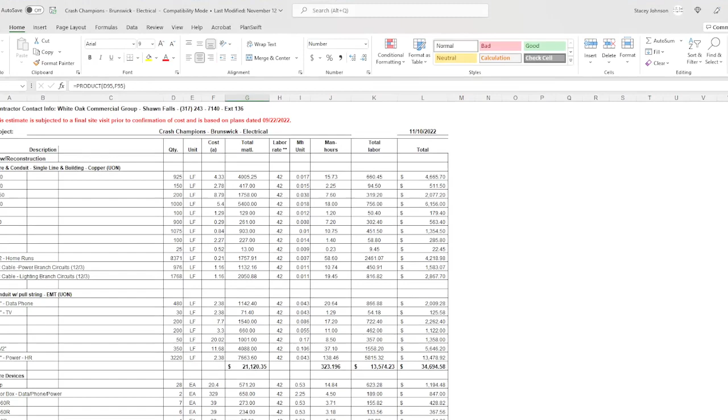Okay, and so you need a good counting tool and you need a good segment tool to measure lines and lengths. And so we'll look at an actual estimate to show you what you want to think about when you are getting your estimate together. Now, this is the way I represent it, and I've completed electrical estimates, only God knows how many, and electricians like the format because it's very clear. It tells them everything they need to know, and if they know their trade, which they do, they can determine if the numbers that you're giving them are kind of crazy or overboard.

Okay, and so you got to think, number 12 wire, you're always going to have a lot more of that. Because why? Because most of the power components run with 3 number 12s. And so you'll run one length for the conduit, but you got to times that by 3 if we're talking about the home runs. So the way we break it down, we have a section for our wire and our conduit. So all of the wire, even including for the single line, and then MC cable.

Most of the branch circuitry can be run with MC cable, where all of the home runs, of course, have to be number 12. Or if it's a particular type of mechanical equipment, it's going to tell you it needs 3 number 10s and a number 6, or vice versa, or whatever, and you'll know from that.

Okay, and so we break that down, all the wire, all of the conduit totals by length, and of course we use a cost book to give us the material cost for the wire and the conduit. Now, rest assured that if you use a cost book that's very accurate, like we use Craftsman, our material cost for the wire and the conduit is going to be 5% within local pricing.

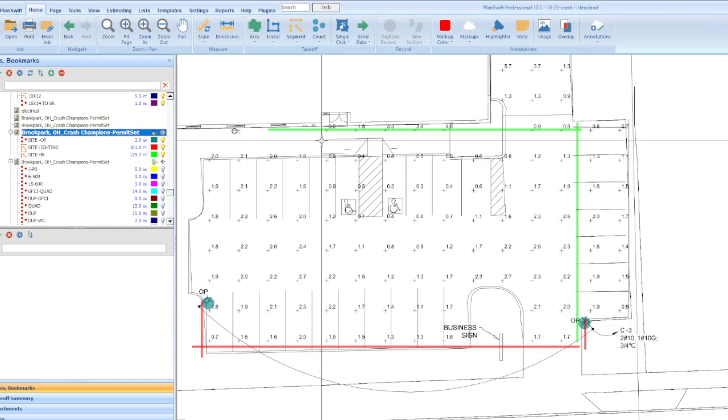But you go to our set. So this one happens to have a site plan. And so, straightforward, this is probably doing too much. They may go zip, zip, from here to that. Who knows? But I do the most. I don't think that's conservative. In the real scheme of things, if they have to trench that, they may not trench it again to go there. They may just go back here and then go like that. Who knows? But for the purpose of our estimate, every estimator has to figure out that same thing. So we're going to give it the most leeway.

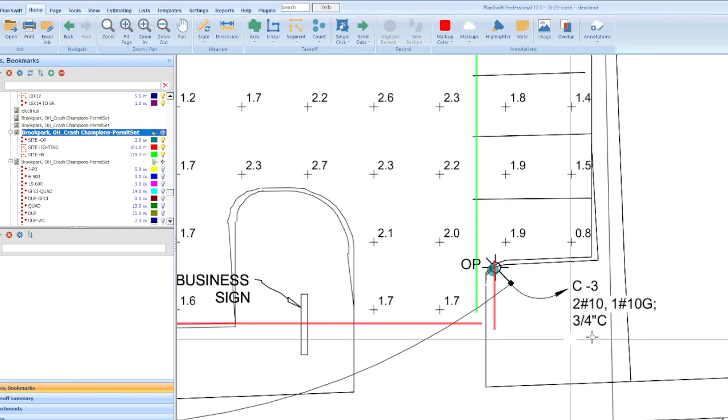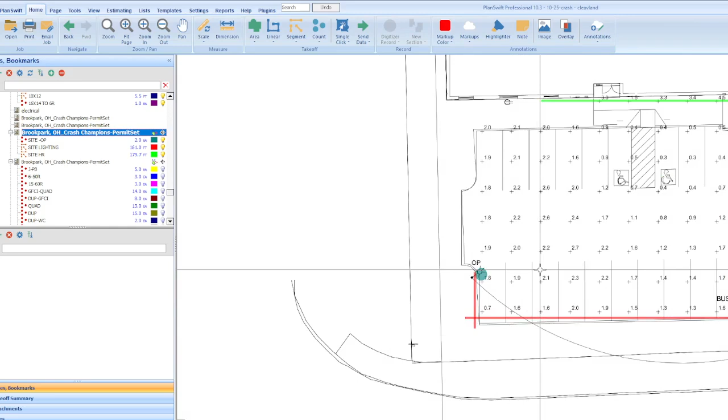Okay? So we know this is underground. We know that's PVC because it's site, right? So we don't have to think twice about that. And we know that it's 3 number 10s and a 3/4 inch PVC. Home run to position number 3 in panel C. So I took it from here, and then once I get into the building, I add whatever additional wherever the panel is in the building. And you got to account for it coming up, right? PVC to EMT, or rigid, or whatever. So just add like 10%, nothing that's mind-boggling. Especially for the initial estimate, because you want to bid as much as you can now. But once you win, you want to go back with a fine-tooth comb and say, okay, is everything covered?

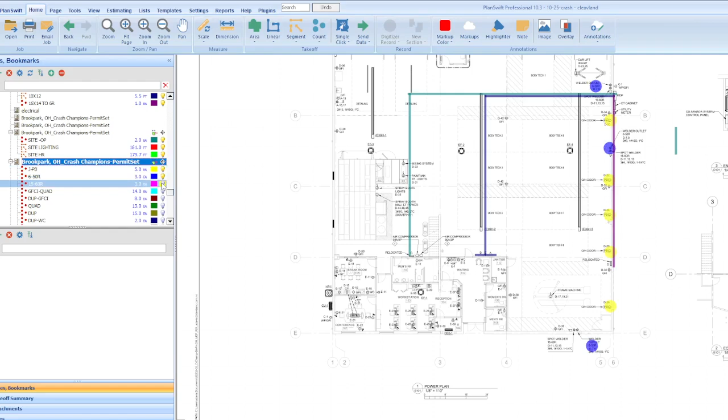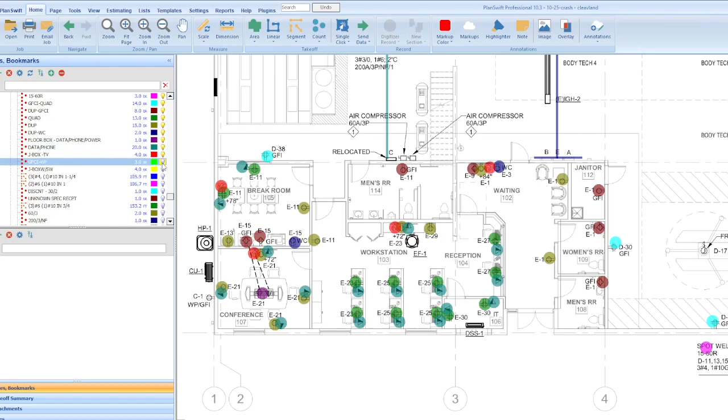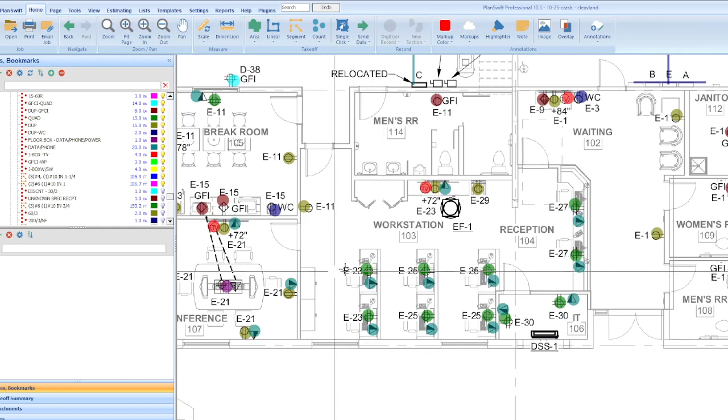Now, this is our power plan, and these are all of our outlets and everything. Duplex, right? Phone and data, so I know that's a duplex junction box as opposed to a simplex or a single one. Fill in everything. This had a lot of bubbles. Okay, so good counting tools are critical. Now, when it comes to your branch circuit, you got to look at where everything is connected. These are both going to position 27, panel E, so I could say these are connected here, and they're probably home run to that position, because they're quads. Same thing here. I can run the branch circuit here, and then I'm going to run an imaginary home run to wherever E is as far as running the wire.

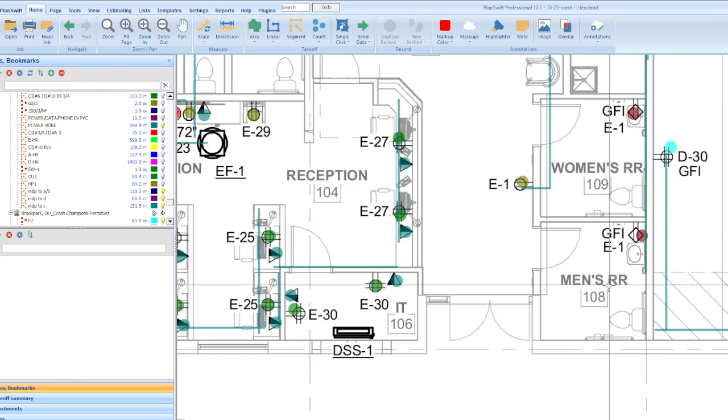Okay, let me see where I have my power wire. I might have done it on a different page. Okay, no, there it is. See? So things I know are going together to the same position on the panel, I'm going to run those all together, and then I'm going to home run that from that end to wherever. Here's relocated C, and where's E? Normally they'll put everything close. Yeah, here's E, panel A, E, B, and C, and then the disconnects. So all we can do is make the lines from where the plans say the stuff is, and we're giving it a good representation.

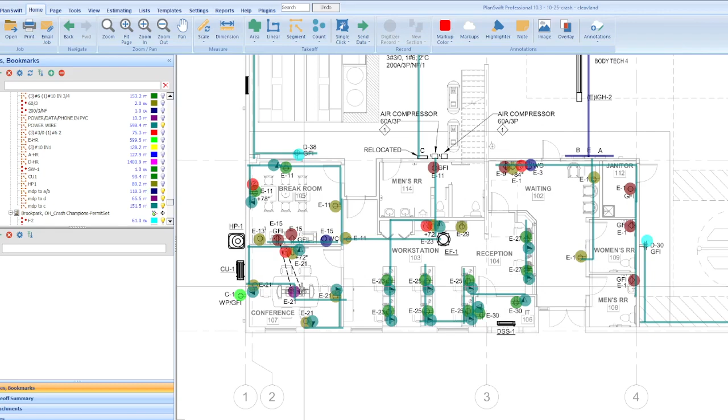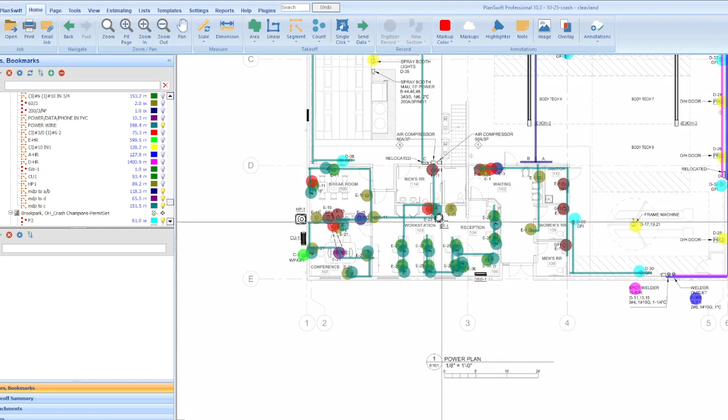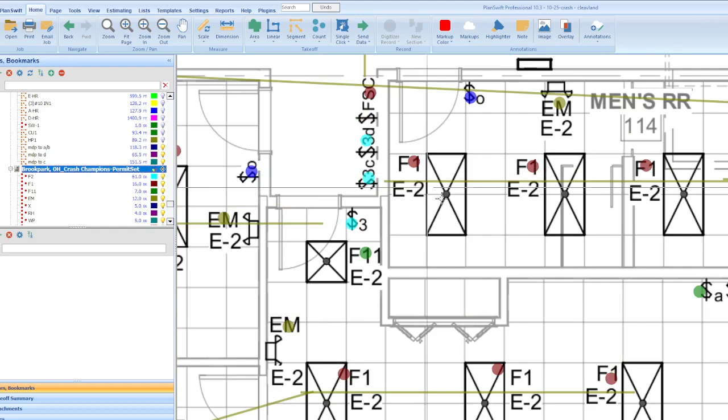We got some underground, so that's going to be PVC, and then we have to transition it up through the new partition. This is a floor box. It shows it on the table, but chances are it's in the floor where the contacts are anyway. So you have to do all of that, and all your lights. Same thing with the lights. You know that they're going to E-2, every other one. All of these are going to E-2, so you want to maybe put a little more diagonal, add 10 or 20%, because you want to give a good representation if it's not already given. We know these two are going to the same place and then going to that, and they're all going to be connected. So you want to do your best to give a good representation of how the electrician may run the wire. And then I think we added like 10, 15, 25%.

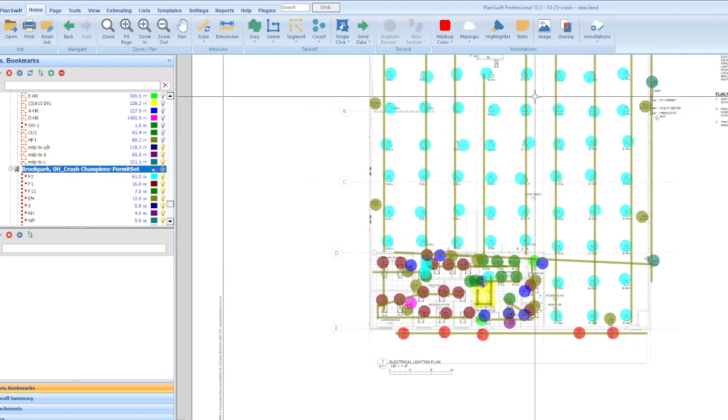Okay, and the electrician will be able to determine if that's a good number, and then we give them the takeoff. It's like, hey, should we be doubling this? Because the person that does the work doesn't know exactly how you should do it.

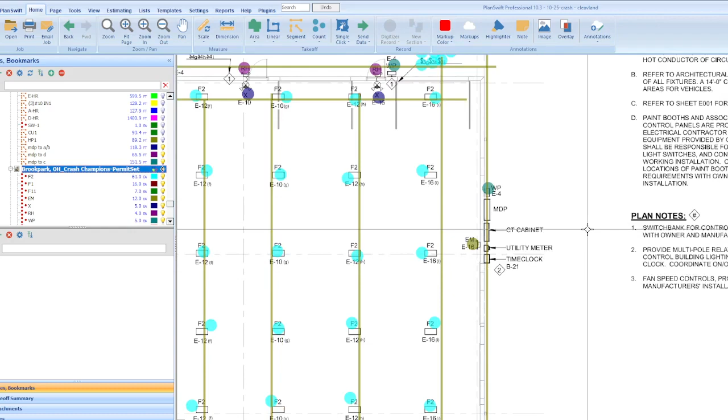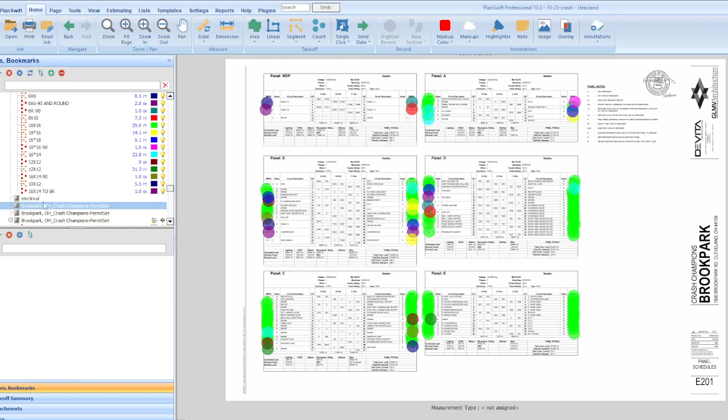Okay, CT cabinet. Now we had to determine for our power how far, because the main distribution panel. And let's go to. We had a good counting tool. Okay. Good counting tool, because you have to count all your breakers. And where's the single line? I think it was maybe in the beginning. So you got to look at the single line and say, okay, where is the single line?

Single line, where are you? Okay, well, we're just gonna keep it moving. I don't know. Where is it? Did I check there already? Of course, no, I did not.

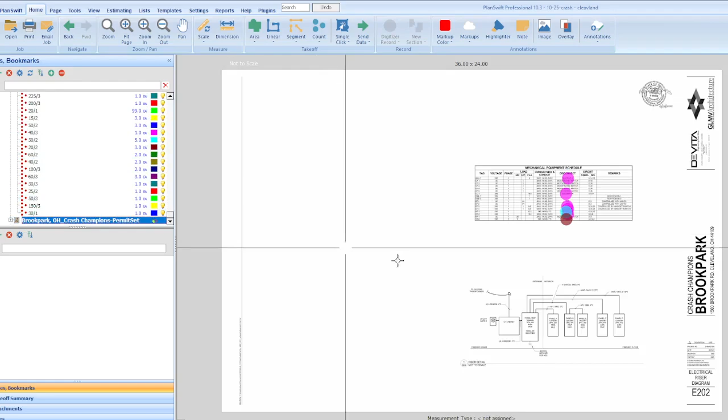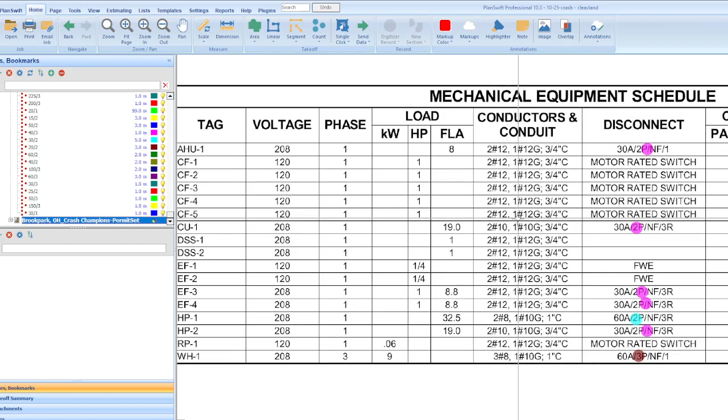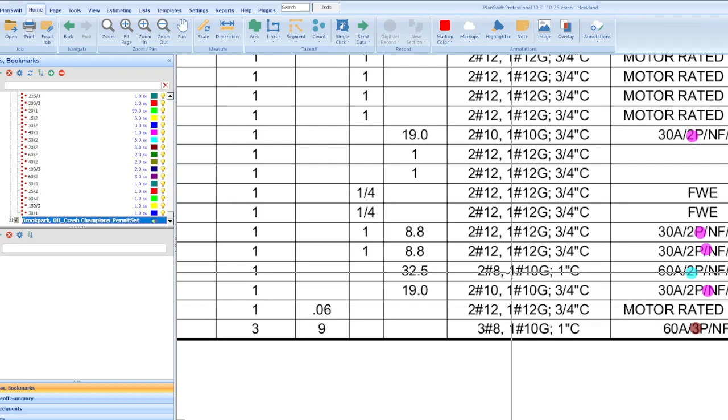Okay, so mechanical equipment, you want to make sure you know any of the home runs, basically, that are not all just number 12. And you want to pull that out, make sure you know where that is and run it to the proper panel. So you'll have all of the wire configurations, number 8s, number 10s. So everything's not always 3 number 12s, depending on the piece of equipment. So that's why they give you that. You got to make sure you pull that out.

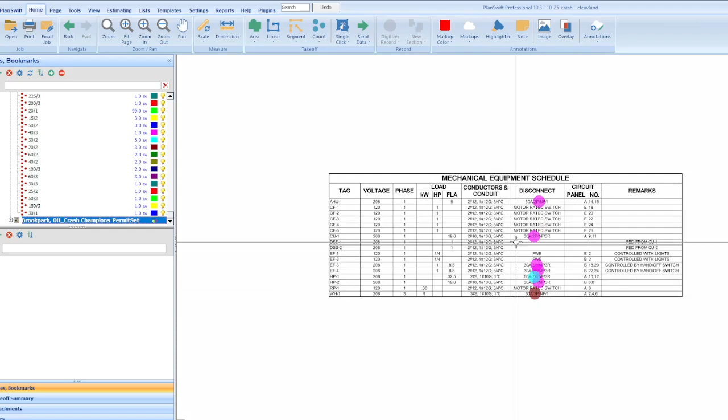Go back to the power plan, figure out where that piece of equipment is, and do your linear measure to the panel that it should be, and then say, okay, it's 3 times that distance, and then 1 times that distance for the number 10, and then a 1-inch conduit.

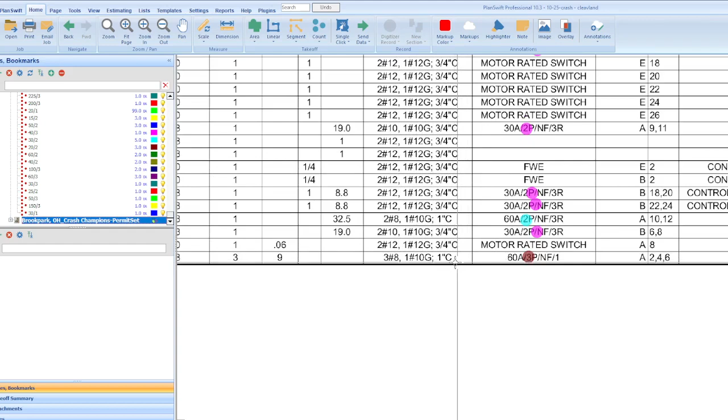Okay, so then for the single line, for all of the feeders, you have to physically go to the power plan. We saw that the main distribution panel was on the outside of the building. Well, in relation to panel A, got to find it. So we look here and we say the main distribution panel is connected to A, to B, to C, and to D. And then it looks like B and E are connected. And I got to figure out all of the physical distances for all of the power feeders to know the exact lengths, right?

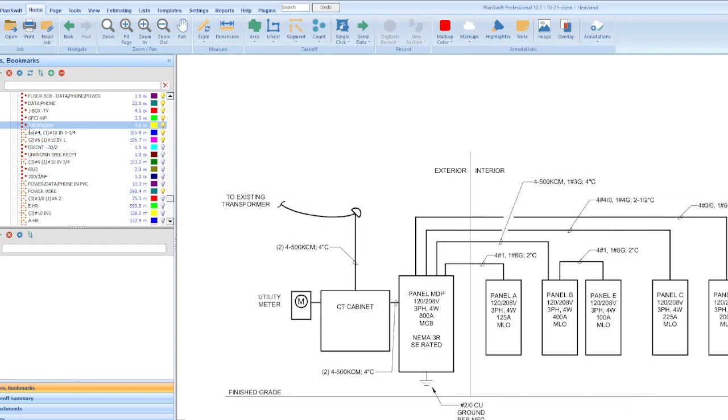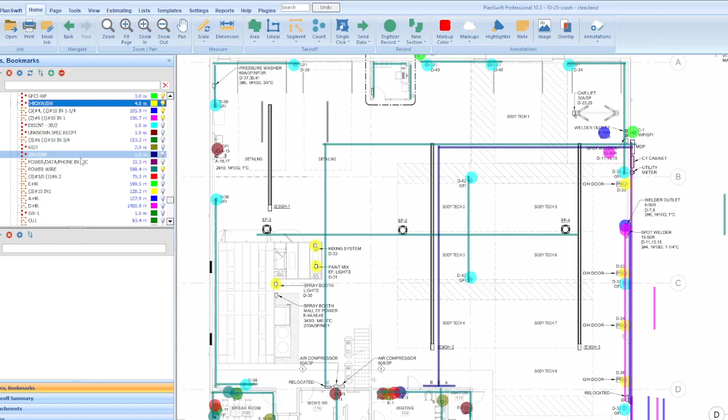So I say, okay, where's the main distribution panel? We just saw it right here. So from there to all of the panels, pretty much. Let's see. There we go. Oh, there already. Main distribution panel. Let me take it out. Main distribution to A and B is that one. Main distribution to D. Take it out. Is that one. Main distribution to C. Take it out and put it back. Is that one. So now I know those actual lengths. Plus add like 10 feet.

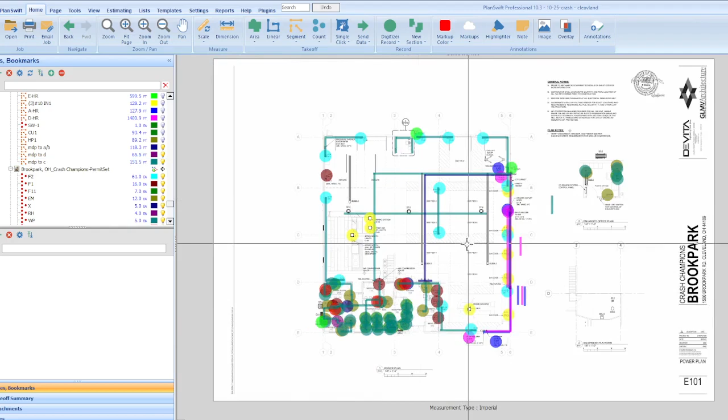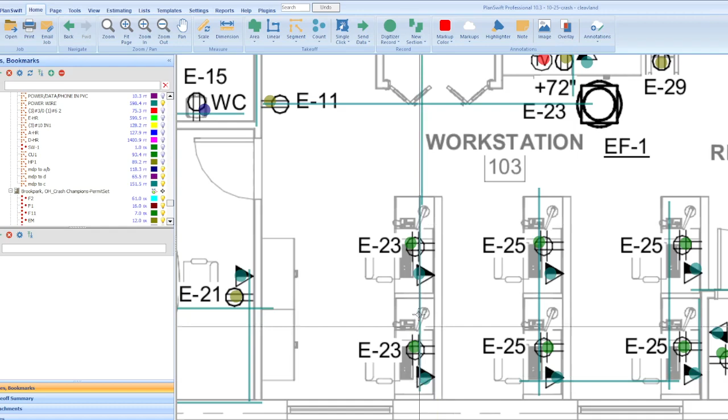Okay, so the basics of electrical estimating is having a real good counting tool and practicing on your conduit lengths. Now, you may get some plans that already have all the lines drawn and you just follow those, but when you don't, just know on the power plan, this is telling you that these two outlets are going to the same position in the panel, so the power feeder can run together. Same with this, same with that. And these can run together.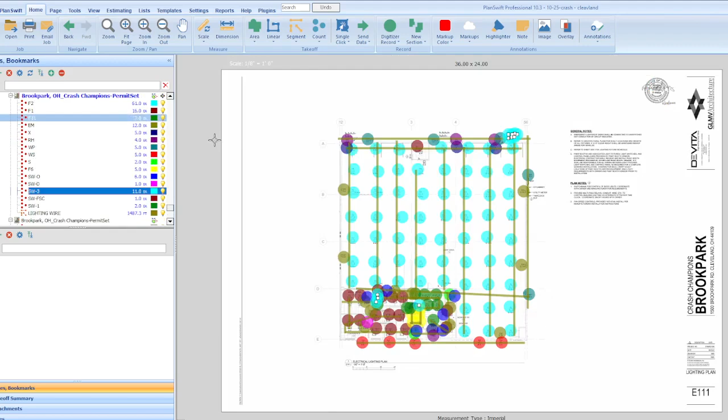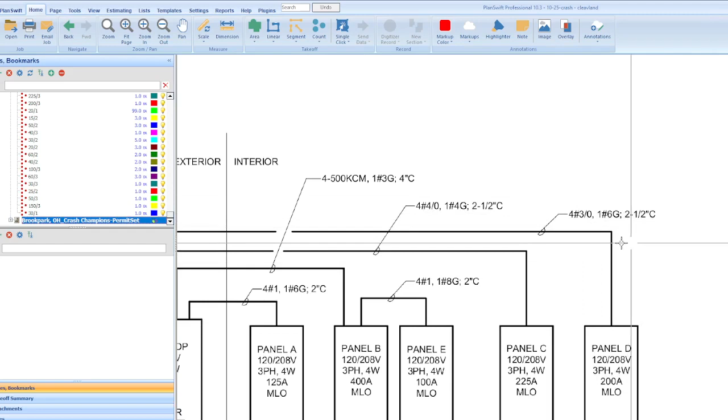E25, oh, we did. And then at some point, we're going to imaginary run it to the appropriate panel for the home run, which we did already. Okay, so that's the only tricky part. Good counting tool. Count all your devices, run all your wire, and pay good attention to your single line because this is where the money is at. So make sure you really measure those lengths well, because those larger wires are very expensive as opposed to number 12. So you want to be very accurate in your measurements.

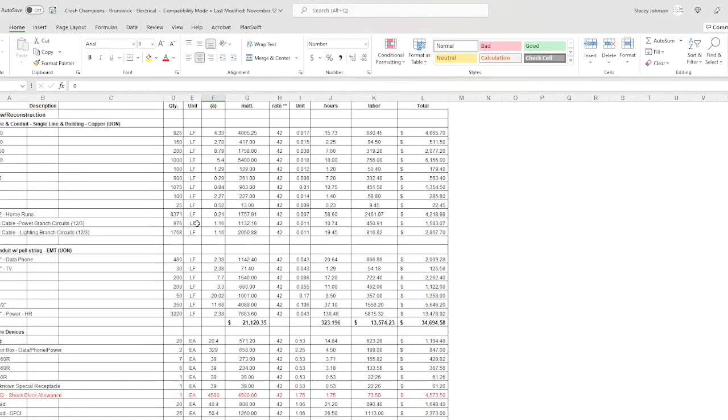Okay, and then you have a beautiful estimate all broken down in the way you want, but the way we know our electricians like is all the wiring conduit, all the wiring devices, then everything in the single line and the disconnects. Then we go to the lighting plan and then any additional items.